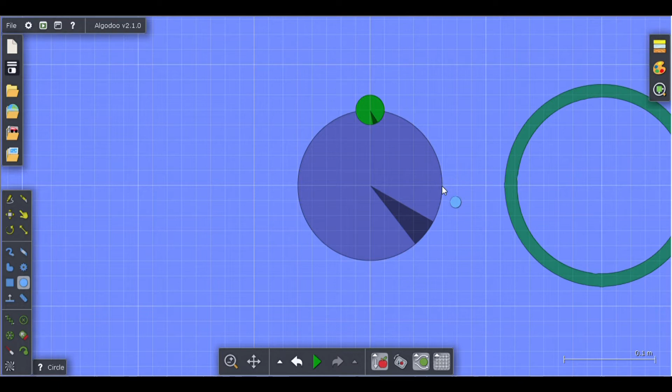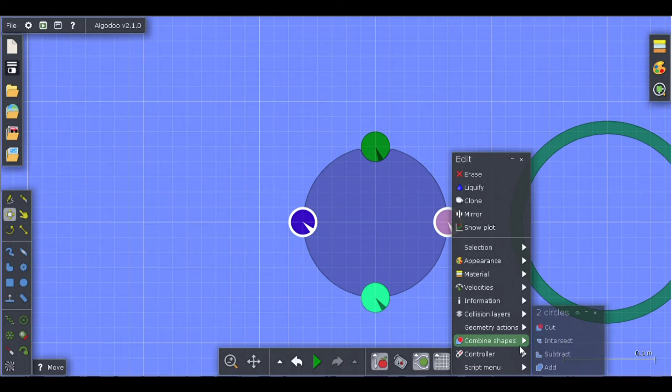Now we're going to focus on that later - we'll bring it close to this, but I want to make 0.02 circles. Since I'm making them 0.02, my marble size has to also be 0.02. Once we're done with that, we've made this. Now what we want to do is subtract it again. I'll combine shapes, subtract - yeah, it's subtracted. This one, subtract. Now if we erase... there you go, that's the main shape of the organizer.

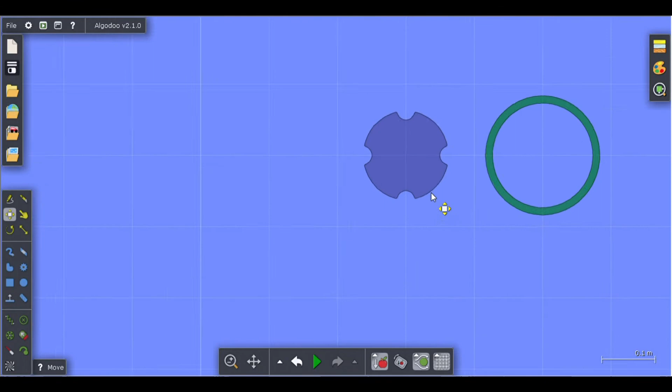Now you might remember seeing this in a marble race, because I don't think organizer is a very good name for it - I just thought of that. Anyway, since it organizes marbles... oh well. So if we move in the circle, according to the calculations I made before the video, it'll work.

So I've got a circle here, which is covering that. But before we do that, select this, go into geometry actions, and add center axle over here. Then what we want to do with this is, instead of add center axles, press glue to background. So we've got that.

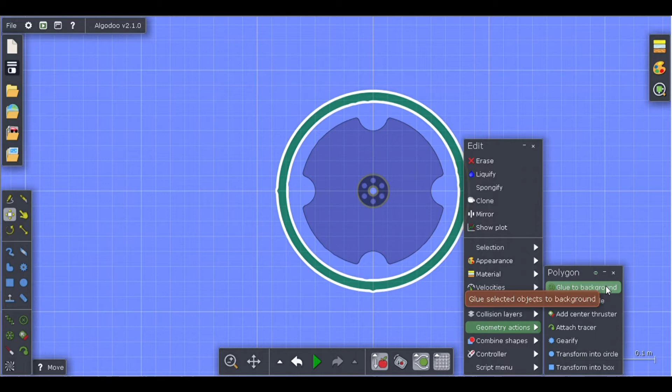Now you can edit this axle. Make it the axle motor - I just heard this in another video, I don't know if it's real, but change the motor torque to as high as you can.

Once you've done that, then you need to move on to the erasing part. The size of your marbles is 0.02 - let's just say 5, it would be 5 for example. Then take the erase tool and put the size at 10 - well, 10 meters, that would be big.

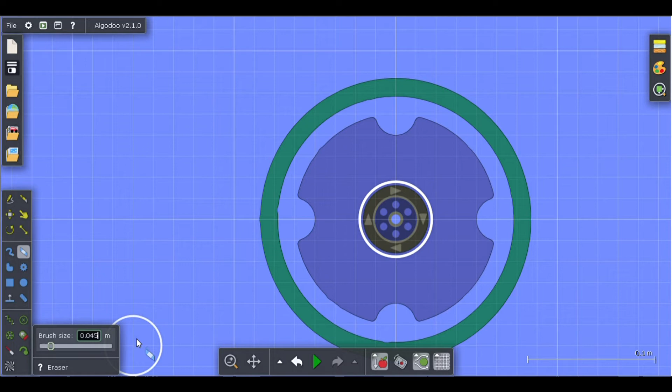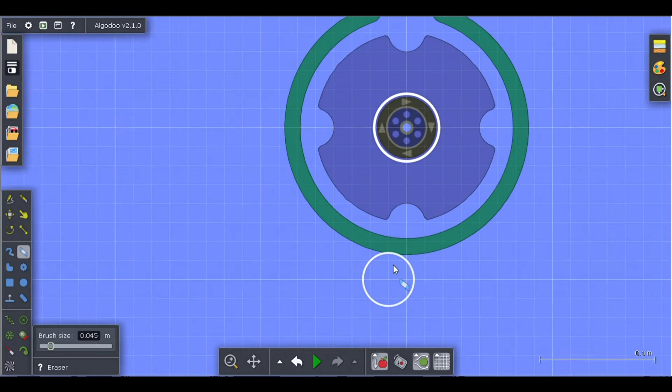But then also add maybe 0.005 or something. So what I've done is put it at 0.045 - the size of the marble is 0.02. If you double that, it becomes 0.04, but that would be such a tight squeeze, so I put it extra at 0.005. Now what I want to do is erase the top part and erase the bottom part. This will make a nice opening for your marbles to come in and out.

Now, since I'm making this at such a small scale, it'll seem like the marbles, when I put them in there, will go really fast, or it'll seem like I've put it at 2 times the speed or something. No, that's just because it's small.

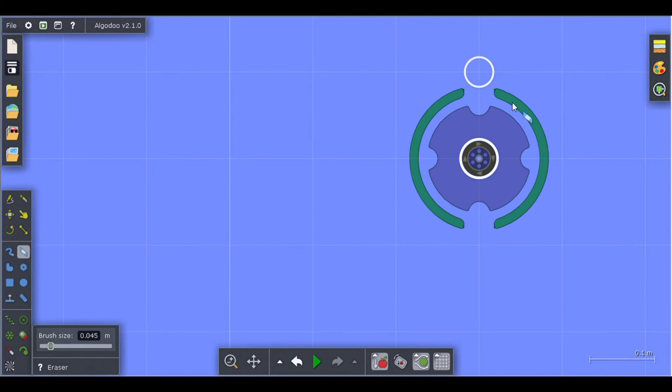So, yeah, now I've basically done the whole thing. As you can see, if I press play and put a 0.02 radius marble in here, it comes perfectly in and drops out. There it is. Okay.

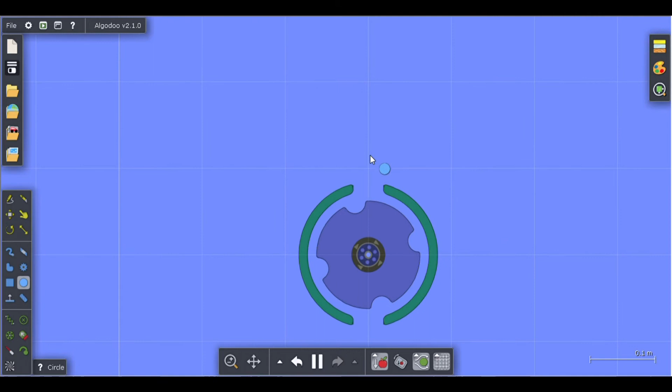Same if I add more marbles. Maybe I'll pause the simulation, make a 0.02 marble, and then clone it. And then clone it again, and again. So we've got 4 clones, I think.

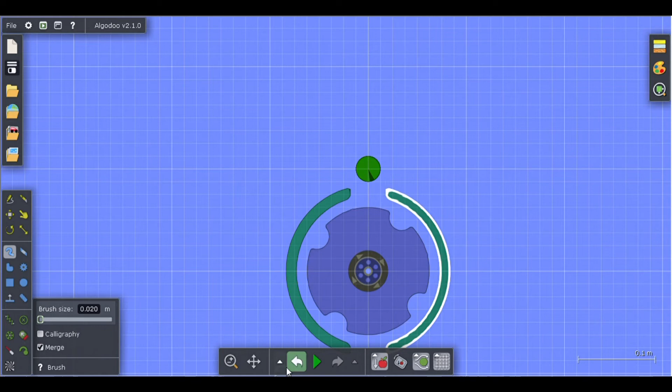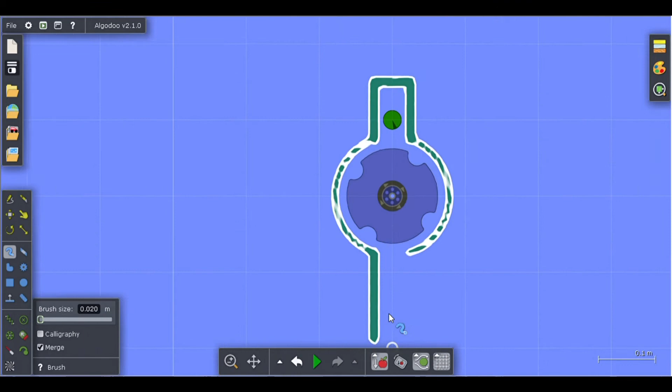I'm gonna use undo. I'm gonna use this to make straight lines here and here. Maybe I'll make one here, and then I'll make the ending tube here. Oopsie. Here and here. As you can see, I had put merge on for that small moment.

Okay, so I'll just press play. Oopsie, I think I cloned it too many times. But as you can see, it works well with a few marbles. Sometimes that might happen, but it's alright. There you go, so that's the organizer.

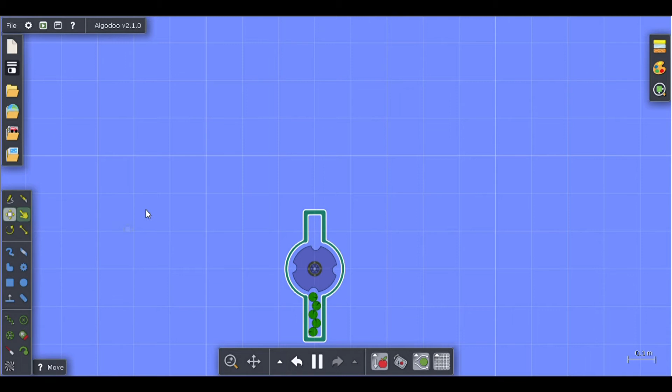Now if we just erase all that, with the same structure we can make an alternator. Now I'm going to zoom out a bit for this, just because I want to. So for the alternator this is a bit easier, which is good.

So I'm gonna make a 1 meter shape. As you can see, you see 2 bold outline boxes. You want to make it almost as if they're covering both of them, but just in the last box there's a little space.

Oopsie, I've done it. Okay, so once you've done that, you want to make a circle, another circle—there are going to be a lot of circles in this, I can tell you that. And then, like that, at the corner, make sure there's only 1 little box if you look closer, until the bold sort of line.

Okay, then take that, clone it. Sorry—take that, clone it. No, backspace, undo. Make sure there's only... see that? Yeah, but make sure it's also upright, around the same height as that, around there.

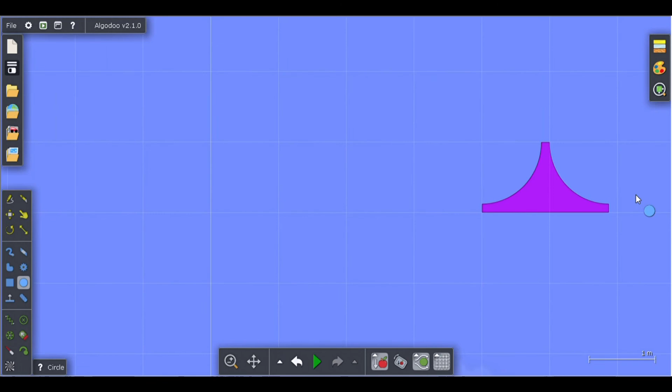So as you can see, there's the hidden shape of the alternator right there. So now all you need to do is, yep, you got it, subtract. And subtract, and then erase. And then erase. There you go, the alternator—that's the base shape of the alternator.

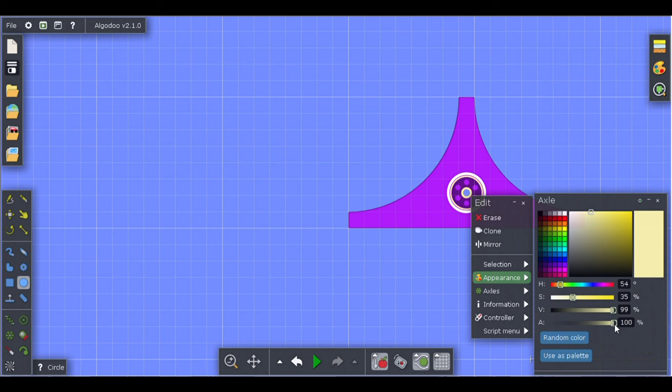Go into edit. Now this might seem weird, but material—change friction to infinity, sorry, and restitution to 0. Now add a center axle, make sure you don't make this one a motor. Then you might want to make a small box here and a small box here.

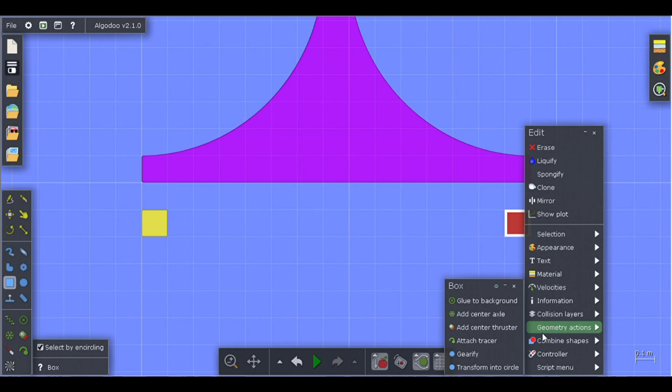Glue to background. Glue to background. Okay, there we go. That's basically a finished alternator.

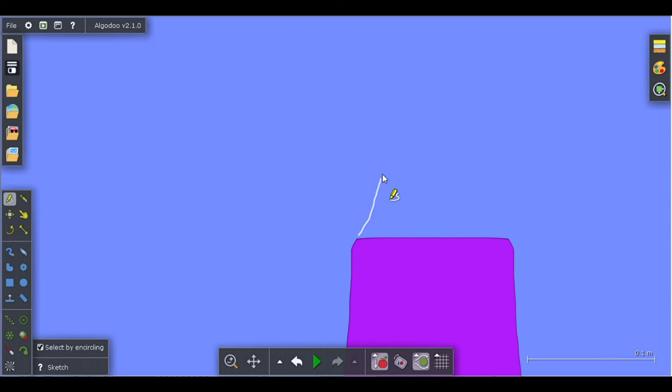What I like to do is, it may not work how it is right now, so what I like to do is turn grid off for a bit, just for now. Take the sketch tool and make a triangle sort of shape and let it spawn into a real triangle.

Then what I do is I move it to there. And then what I do is combine shapes instead of subtract—I put add and then erase it. It's the tip. So that's basically what I do, and I think that's done.

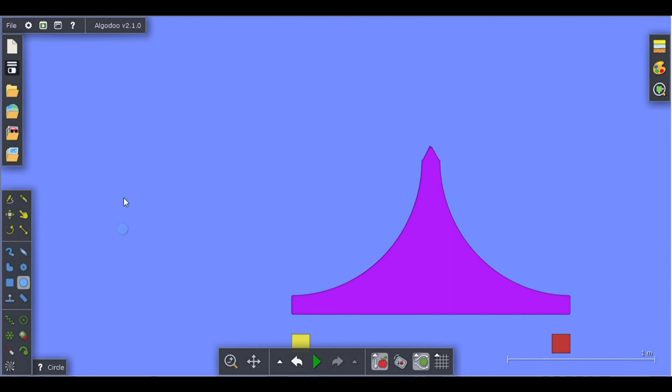And that's the alternator. And then the other side, other side. As you can see, even if I put it a bit at this side, yeah, it will go at that side, but when it goes at that, like that. So that's how you make an alternator.

If the material settings didn't change, then what would happen is it would bounce right off that and then tilt at the other side or something, and then it would bounce off the other side a bit.